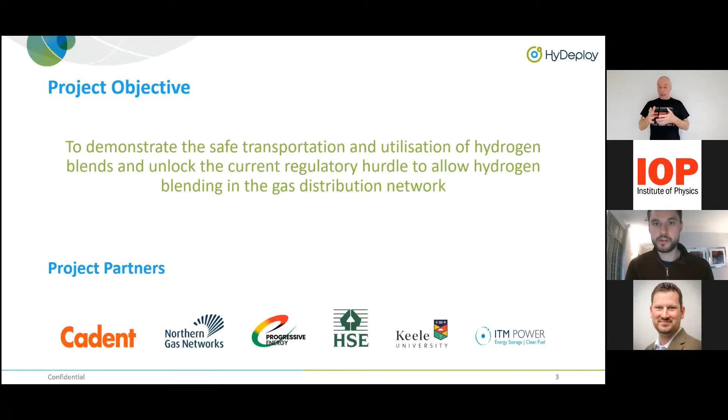So the first question is, why do we bother doing this in the first place? What's the point of blending hydrogen into the system? At the moment, we have no hydrogen at all, really. The only hydrogen market that exists is that which exists within chemical processing. Principally, this is for the production of fertilizers, as well as the desulfurization of fuels within refineries. So it's within a sort of chemical context that hydrogen has any relevance.

No one uses hydrogen to any great extent for power, for transport, or for heat. Now, the reason why this dynamic has occurred is because the system today just can't cater for the introduction of hydrogen to any great extent, because it requires too many people to move at once. So if we take where we are today, where we have no hydrogen at all being used in, say, a domestic setting, what you would need to go to full hydrogen is the co-deployment of hydrogen production and hydrogen appliances, both at the same time, to effectively complete the supply chain from production all the way through to usage.

Now, that's just too much counterparty risk all over the place to enable that to actually work, because effectively there are a load of investors that sit on the production side, and there are a lot of investors that sit on the appliances side, and both of them stare at each other waiting for the first one to move, to be able to form the business case for them to move. And because everyone stares at each other, no one moves first, and so nothing ever happens. And that's effectively been the story of hydrogen to date. Hydrogen was cited back in the 70s as being a potential fuel of the future, but it hasn't really happened because of that commercial dynamic.

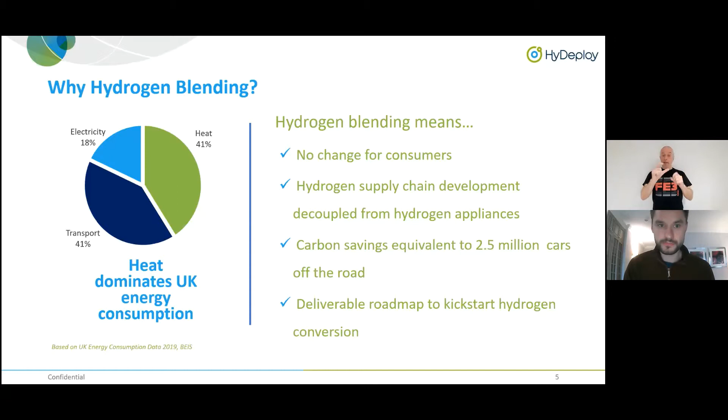So where are we today? We have a set of regulations that define what gas can be transported through the network that then is delivered to all of our appliances, and that's the Gas Safety (Management) Regulations. Now, the quality of gas that can be shifted through our network is set out in Schedule 3 of those regulations, and within Schedule 3 there is a defined limit of hydrogen of 0.1%.

So there is an effective ban on hydrogen, which means that this is the principal regulatory barrier that has to be overcome to enable the hydrogen market to actually take place, and that is the purpose of the HyDeploy program. Our objective is to move that to 20%, which is what we think is the upper limit of what the current system can take before you would need to start changing out appliances.

So where does the government sit in all of this? The government is relatively supportive of hydrogen, particularly Boris. He often flags it as being one of the key priorities, particularly within the energy space. And there are two documents that are of most relevance. First, it's the 10-point plan, and then more specifically, the UK hydrogen strategy.

In the 10-point plan, the government have pulled out two policy impacts that they wish to enact as it relates to hydrogen. The first is on the supply side, which is to enable 5 gigawatts of hydrogen production by 2030. And then the second objective is on the demand side, which is to enable the blending of hydrogen. So they quote here 7% by energy. That's the equivalent of 20% by volume. And they've set out a target milestone to achieve blending by 2023.

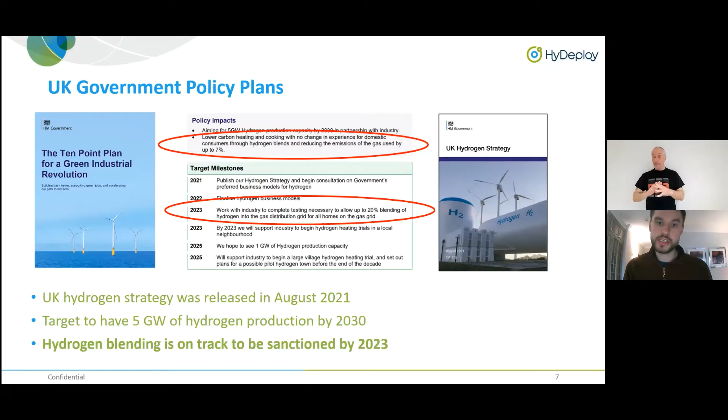Now, the UK hydrogen strategy then puts a bit more colour as to how we go from the state that we are now of no hydrogen to a state where we can enable blending. And the government's set out two prerequisites to enable what they've dubbed a policy decision, which is effectively BEIS, the Department of Business, Energy and Industrial Strategy, supporting the regulatory process for changing the regulations. And those two prerequisites are two independent assessments.

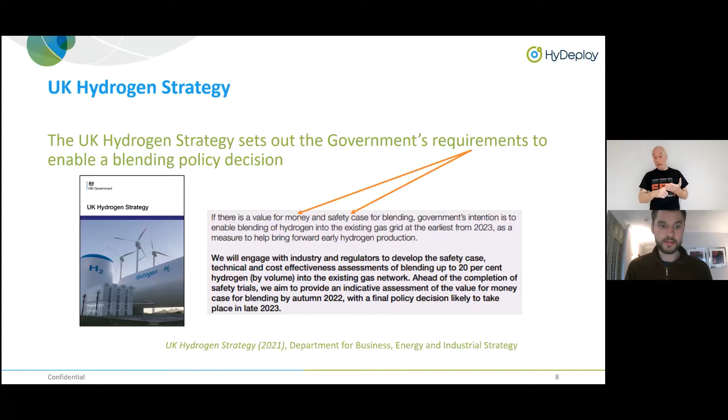The first is a value for money case, which the government are undertaking themselves, and that's to effectively answer the question, is this a sensible thing to do? And then the second is a safety case assessment, which is being done by the HSE, which is asking the question, is this a safe thing to do? And if both of those assessments come out with a positive result, then the government will support the necessary regulatory process that's needed to update the regulations. And they're looking to make that final policy decision at the end of 2023. So in parliamentary terms, it is pretty much just around the corner.

So this is just a pretty simplified graphic to show what process we're in, where you have these two independent reviews going on, first the safety, then the economic, and then those two both flow into a government policy decision. And this is where HyDeploy sits in that chain. We are developing all of the safety evidence that's needed for the policy decision, and then we'll engage with the HSE throughout the year to review all that evidence to hopefully be able to demonstrate the case that blending hydrogen is a safe thing to do.

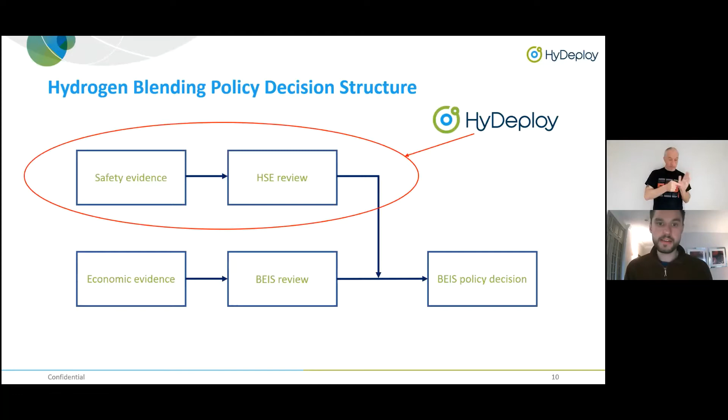So now that I've set the context of hydrogen blending, I'll go into a bit more detail around the project itself. I'll first talk about the trials that we've undertaken, and then I'll go into a bit more detail around the evidence that supported those trials, and that will ultimately support the case that we made to the HSE. This is a £23 million programme summarised into one slide, so you can appreciate there is a level of artistic license here.

But our programme is broadly split into three phases. The Keele trial, which I will speak about, and which is completed. Then there is the Winlaton trial, which we are currently in, which we're due to complete in the summer. And then the third phase, which is what we are primarily focused on now, which is filling the rest of the evidence gaps to enable that broader assessment of evidence to take place.

So the Keele trial that we undertook was at Keele University between October of 2019 and March of 2021. This was the first use of gas containing any hydrogen since we completed our conversion from towns gas, which was in 1976. So it was a relatively historical moment because this was the first time in the modern incarnation of the gas network that any hydrogen had really entered the system.

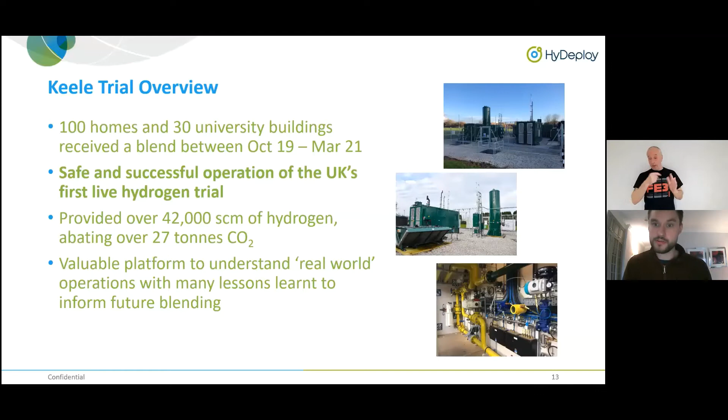So we didn't see any increase in the failure rate of appliances or in the leaks from the network or any call outs. Basically everything operated as it would have under natural gas, and there were no operational issues that arose. So that's what we're primarily trying to demonstrate, that systems that are built for natural gas are perfectly capable of operating on a blend, and within the bounds of the trial that we undertook, that was overwhelmingly demonstrated. There is a report on this which goes into much more detail. It's an 80-odd page report that is publicly available. So if you really want to go into the detail of the trial, I would recommend you find the report. It is on the website.

So where are we now? We are currently operating the second trial, which is in Winlaton. This is in the northeast, just outside Newcastle. This is 668 homes, a school, a church, and a few other small corner shops. And this really does look like a very small town. So we basically isolated a small village, and that village is being supplied with the blend. Now, there are two key differences that Winlaton has relative to Keele. The first one is that this is a public gas network, so this looks very much like the physical makeup of most of the supplies of gas to our homes. So we're no longer on a private gas network. We are now out in the wild, as it were.

And from a supply perspective, this is an open market. So we have to deal with all of the suppliers of energy. We have to have a billing regime that can cater for anyone being with any supplier and switching at any point, which is a more complex situation than just dealing with one entity. There's also a much broader range of appliances within the Winlaton trial, which is more representative of the UK baseline, and there is a greater degree of variability in the state of those appliances, from safe to not so much.

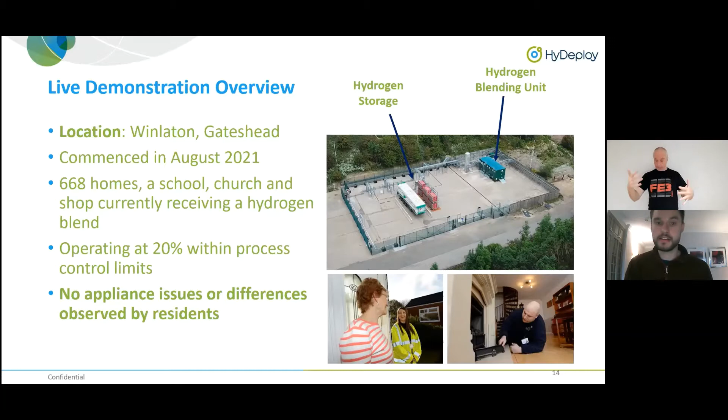So the trials is what everyone sort of likes to talk about and likes to point to because they're the big shiny pieces of metal. But actually, the enduring value of the programme will be the evidence base that unlocks those trials. Because although I've been using the term trial throughout this talk, trial is actually a slightly misleading term, because a trial would imply that there is a material degree of unknown that you are then discovering through whatever you're doing.

And that's not really how these things work, because to enable the trials to take place, the HSE has to provide a bespoke exemption to the gas safety management regulations to enable that to happen. To enable the exemption to be achieved, you have to put forward an evidence base that demonstrates that what you're trying to do is as safe as the current system. And so that requires you to understand all of the risks, understand what will happen, and be able to demonstrate to the HSE that basically everything's in control.

So they're not really trials, they're more demonstrations, because they're demonstrating that what you thought was going to happen does happen, as opposed to opening a box and trying to figure out what's inside it. So it's the evidence that supports the exemptions that lead to the trials that actually is the enduring value, because that's the stuff that will be applicable to a much broader region to enable or to unlock much wider blending.

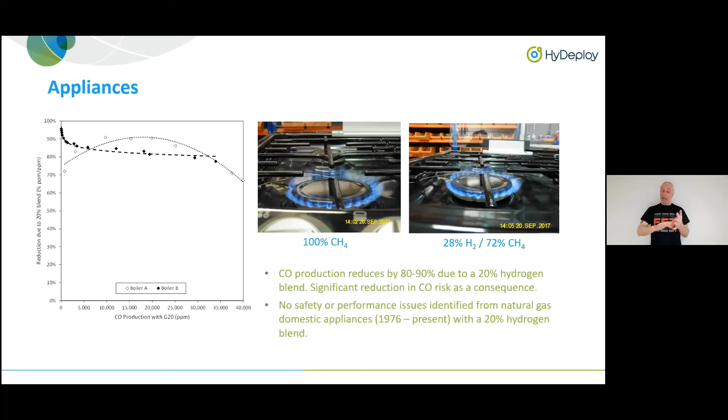Next on the list is always materials, because this is always quite interesting to learn about. Clearly, materials are ubiquitous in terms of the stuff that builds all of the pipework, all of the components, all of the appliances, etc. There has to be a material of some sort that leads to the structure. We assessed all of the common materials that are used across this system, so steels, irons, aluminiums, elastomers, brass, etc., and built a representative sample set of materials.

And although there is a huge amount of evidence behind all of this, the summary is that we found no meaningful change in the mechanical properties of the samples tested as a consequence of introducing the blend. So there was no statistical difference in the distributions of mechanical properties that we found across all of the materials, and that allowed us to justify the conclusion that the materials used on the network are as suitable to transport and be exposed to a blend as they are to natural gas, and therefore the frequency of failure of those materials should be the same, because their mechanical properties are not being degraded by the introduction of the blend.

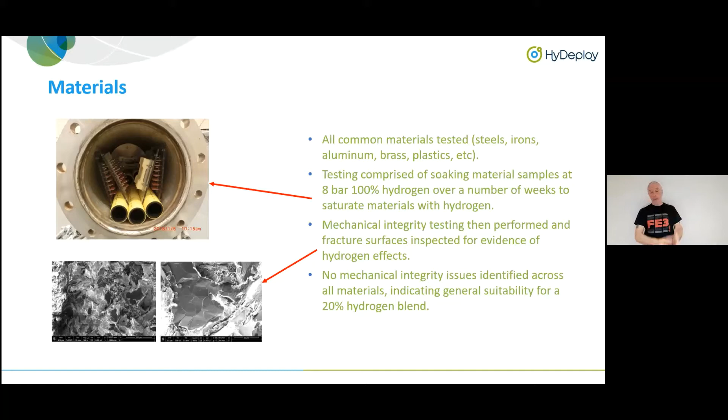And then lastly, which is probably of most interest to this audience, are gas characteristics. We have undertaken a body of work to try to understand the basic physics of the gas characteristics. The reason why we've had to commission all this work is because quite often gas characteristic analysis, particularly explosion analysis, is done at very extreme conditions. So you're looking at 300 bar hydrogen whizzing down a tube at 400 degrees and then being ignited, and the results that you get from those sorts of experiments simply don't map down to the level that we're talking about. There isn't a lot of crossover, and there's a very small amount of evidence that is directly applicable to the kinds of scenarios that cause harm in domestic settings and commercial settings.

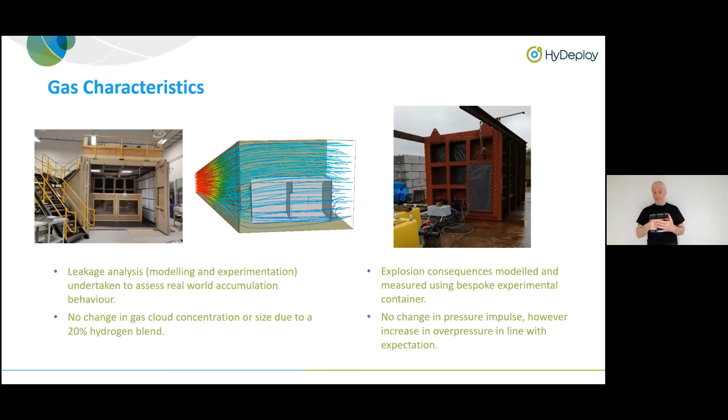So impulse is what a building will experience from a pressure wave. It is the pressure wave hitting the structure multiplied by how long that pressure wave is sustaining the pressure, and it is impulse that leads to building collapse as opposed to pressure. So you can hit the building very hard with a pressure wave for a very short amount of time, and it can withstand it because it effectively doesn't have time to respond. But if you hold that pressure wave on the building, then it has time to yield, and that's what causes collapse. We took the more conservative assessment and said we will base our risk assessment on that, and that's in line with typical explosion risk assessments, because it's the more conservative basis to take.

So where are we now? We believe that the evidence that's been gathered that's justified the trials to date, that have all gone into an overarching QRA to be able to have a numerical comparative risk assessment of natural gas versus blend. We think that evidence is sufficiently universal that we'd be confident arguing the case that for all domestic installations and low pressure systems, a blend is actually a bit safer than natural gas.

Where we have gaps in our evidence base is basically as a consequence of the trial structures. So what we haven't undertaken is the experimentation on high pressure systems and on industrial users and large commercial. This is because they haven't been part of our trials to date, so there's been no driver to do so, because as part of the trials it hasn't been necessary.

But clearly, as our gaze opens up and we are looking to make a much wider case to the HSE to enable blending across the gas system, we have to make the same case for industrial and large commercial as well as high pressure systems. So they are the two core focuses, or foci, that we have. That's the end of my presentation.